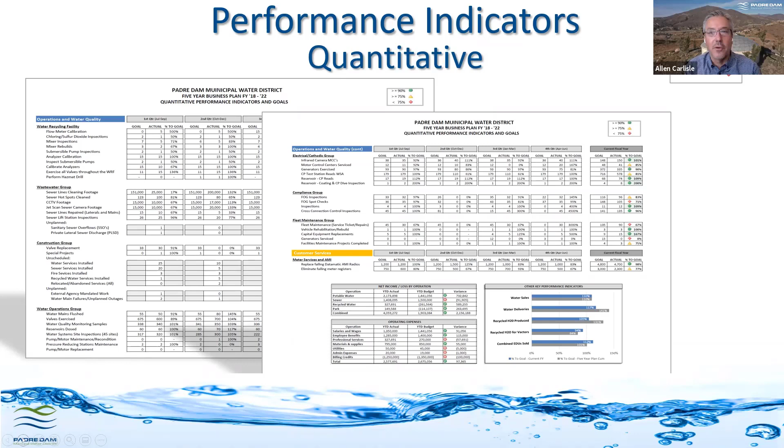With that background, I want to introduce Dr. Summer Girl, who will walk us through some of the workshop components. Before I turn it over to her, I want to thank the public for being part of this and giving us your input. We want to know what you're thinking, what you think we need to invest in, your concerns with your water district, and where you think we need to focus. I want to say one last thing: we recognize this is not our water district, it's your water district. We happen to be superintendents and managers of it for a short period in history, but it belongs to the community, and we're responsible to you — to listen and incorporate your concerns and ideas into any plan we create moving forward.

So with that, Summer, I'd like to turn it over to you. Are you ready to go? Thank you, Allen. I am.

It's good to see you all, and as the evening carries on, if more people join us, we'll welcome them in. As Allen said, my role this evening is to facilitate gaining input from you all. I'll walk you through what the agenda for the evening looks like. There will be opportunities to participate in a variety of ways, including listening to presentations on some projects currently going on in the district, participating in some polling, and time toward the end of the session for us to engage in dialogue. I wanted to highlight that typically these community forums would be held in a room, gathered together, sitting at tables and engaging in dialogue. Over the last year or so, many of us have become accustomed to engaging this way via a virtual platform.

Just a little bit about our water rates, some things you may or may not know. Basically, our water rates are broken down into 3 different areas. About 36% of our water rates go to purchasing actual water from San Diego County Water Authority, and about 23% of the rates go to capital investment in our infrastructure. As Allen mentioned, we have over $1 billion worth of infrastructure, things like reservoirs, pipelines, pump stations, and different things like that.

Mark Niemiec, our Director of Engineering, will highlight some of the major projects we've been working on more recently. The remaining 41% goes to Padre Dam's operations, which is what it takes to operate and maintain the system. There's a couple of slides Mark will touch on regarding certain areas engineering works on, and the operations department as well.

There are some unique rate factors to Padre Dam that make it very hard to compare rates among different districts, so we wanted to mention a couple of those. The first is that all of our water is imported. We get the water from the County Water Authority, and that's what the rate is that we pay for — 36% of your rates go to that.

There are other districts that have the benefit of local groundwater or reservoirs. For example, if you have a reservoir and it rains, you get free water — all you've got to do is treat it. We pay for the water, and then we also have to treat it. That can be a huge offset to costs in a year, up to $2 to $3 million. We are trying to do something about that, so we're currently developing our own local water supply — that's our advanced water purification program, and Kyle will touch on that later.

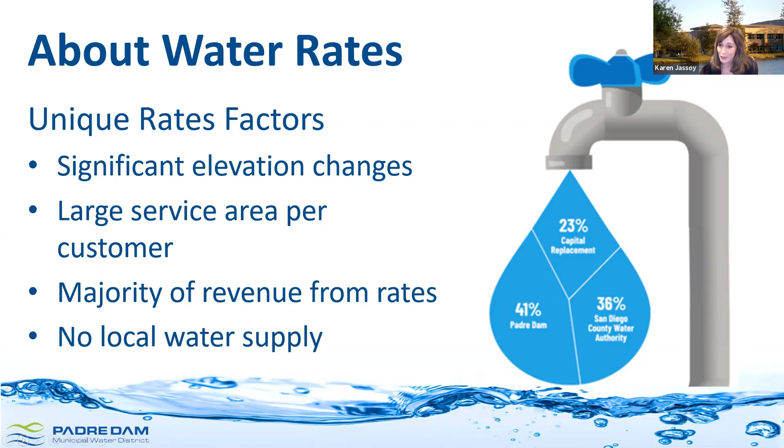It's all rates. Just wanted to mention here, in case you don't know, that we do have Santee Lakes recreational preserve, but that is run separately, so your rates don't go to run the park. That's all from the rates they charge for camping and day use, so it's run on its own, not by water or sewer rates. So those are the two main areas I wanted to talk about.

Over to Mark Niemiec, our Director of Engineering and Planning.

Thanks, Summer, that was a great poll. Good evening to all those participating in this workshop tonight. My name is Mark Niemiec, and I'm the Director of Engineering and Planning here at Padre Dam. I want to start by saying that modern, reliable, and sustainable infrastructure is important to the communities we live in. It connects the communities, drives our economy, and keeps us healthy and safe. The engineering department at Padre Dam provides responsible and technical support to plan, develop, design, and manage construction of our systems and facilities.

The engineering department really functions as one cohesive group, but we can break it down into three main subgroups or components: the capital improvement group, the development services group, and right-of-way. Each discipline has its own unique responsibilities and requirements, spanning a wide variety of tasks that we oversee and are responsible for. This gives you a good sense of an overview of the engineering and planning group.

Let's take a closer look at the Development Services Department. This work group provides the development community and individual customers with a resource to get answers and help process projects through Padre Dam and other jurisdictional agencies. It's often the first point of contact for individuals trying to build within the water district. Our support ranges from simple easement reviews to starting the process for new installation and collecting capacity fees. Our goal is to ensure that every project served by Padre Dam complies with district, local, and state regulations and standards, resulting in beneficial use to our system whenever possible.

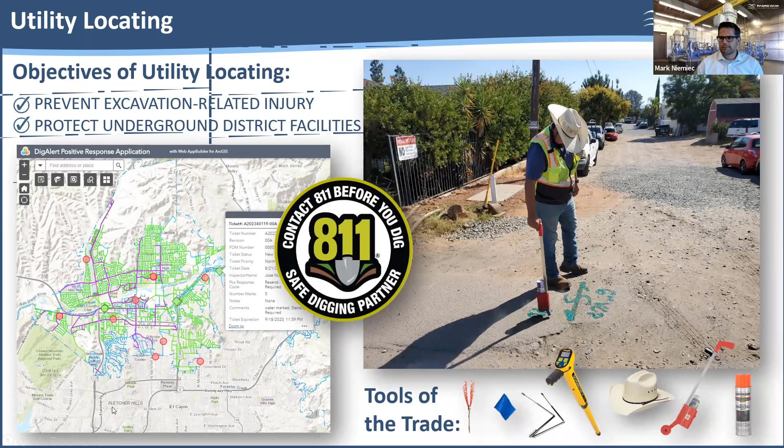In the engineering department, we also oversee our right-of-way and easement interests. Some of the core functions include safeguarding our interest in the acquisition and management of our properties, reviewing and writing legal descriptions for granting of easements, and reviewing and drafting of various property lease agreements, including cell sites. If you see antennas on some of our water reservoirs or tanks around the city, that's from cell providers.

The right-of-way agent also reviews development and CIP projects to ensure any right-of-way needs are adequately addressed.

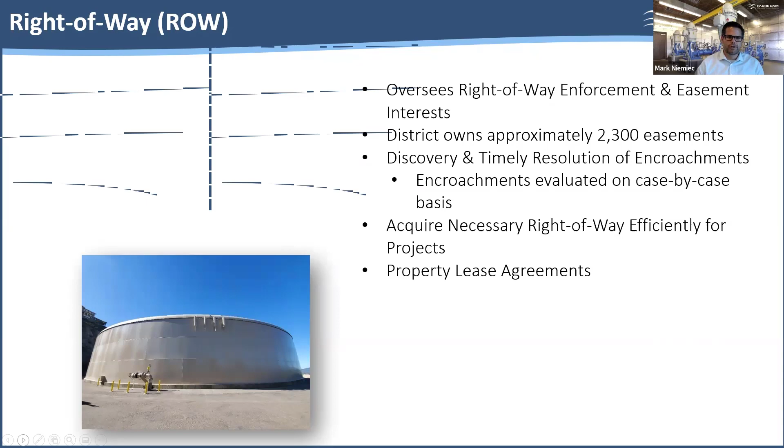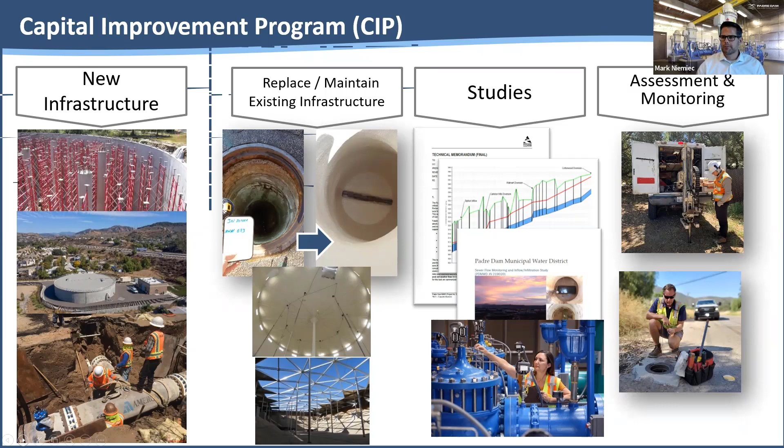So shifting to the next core group within engineering is the Capital Improvement Group, or CIP. They encompass a variety of projects, including projects that implement new infrastructure, projects that replace existing infrastructure, studies that analyze current conditions and identify optimum improvements for future projects, and projects that utilize emerging technologies to assess and monitor the condition of the assets and forecast remaining service life.

Ultimately, we're striving to meet the customer's needs. Like Allen mentioned, this is your system, and we're here to meet your needs in the most cost-effective manner. Through the development of the CIP and in conjunction with the 5-year business plan, Padre Dam ensures sufficient financial resources are invested to execute the identified priority projects. The foundation of the CIP is based on what we've termed the 3 R's: reliability, resiliency, and ratepayer affordability.

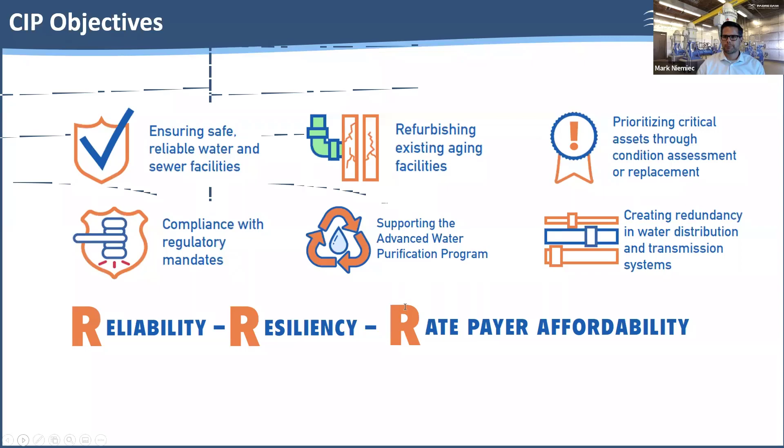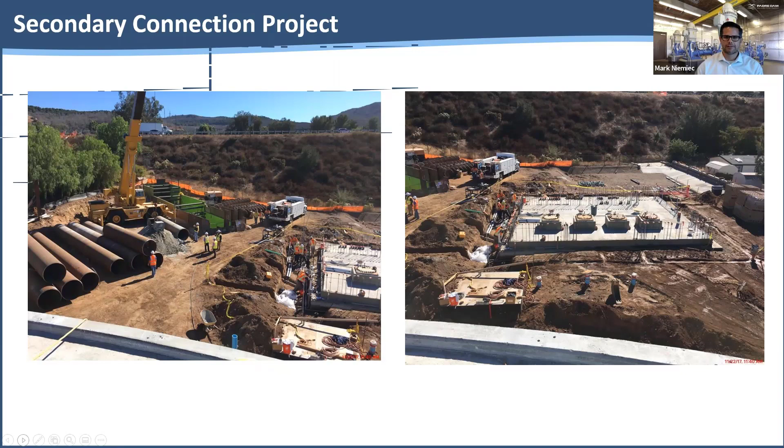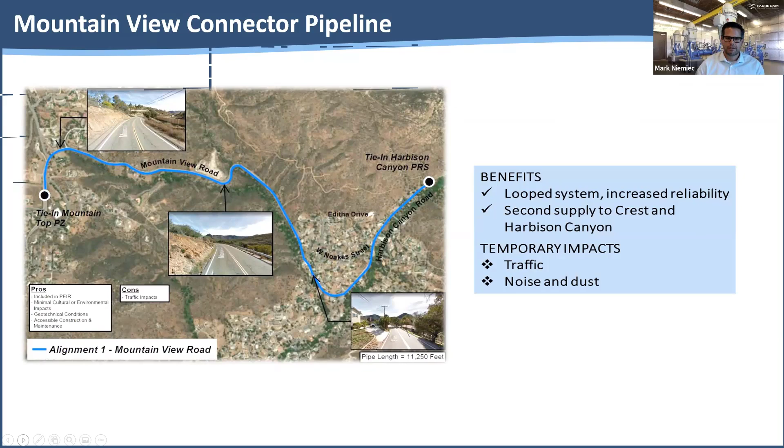Another project we wrapped up recently is the Mountain View Connector Pipeline. This was approximately a 2-mile pipeline that provided a secondary supply line to the Crest and Harbison Canyon areas. It benefits the system by looping it, meaning we have different ways to move the water around. Again, there's increased reliability. There were some temporary impacts that we managed during construction — that's where our inspectors come in, that's their job. Ultimately that project was completed on time and under budget.

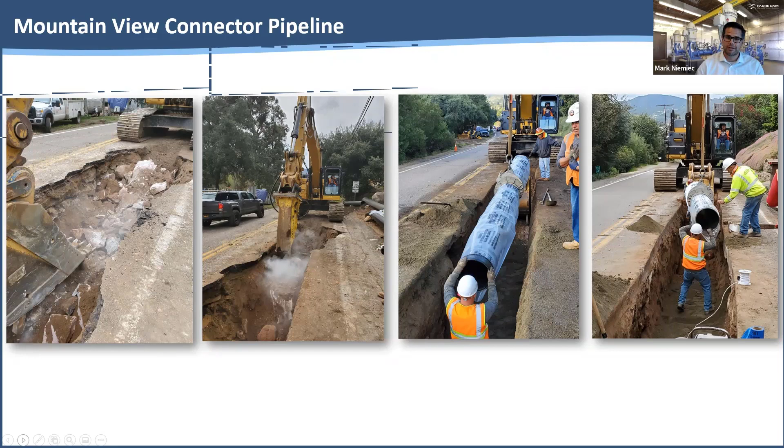Some more photos here of the work in the Mountain View Connector Pipeline area. You can see there is some excavation going on, and if you're from East County or have been around East County, you've seen trenches. There's lots of rock, so contractors deal with having to remove that rock so they can install the pipeline in the proper bedding with the proper surrounding and compaction on top. Again, inspectors are out there ensuring the new infrastructure is installed correctly so it'll last for years to come.

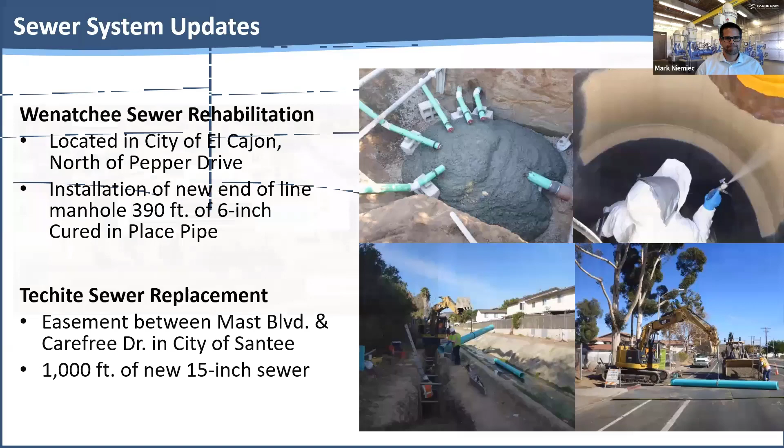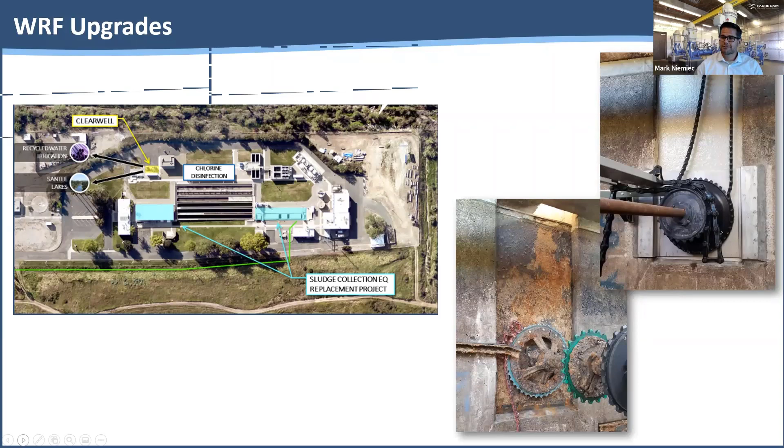Thanks, Mark. So I'm going to now turn it over to Kyle Swanson, who's the director of the East County Advanced Water Purification, and he's going to share with us some insights about resource management. Kyle. Great, thank you, Summer. Yeah, excited to share with you guys about the resource management. I'm going to start with an introduction to the East County Advanced Water Purification Project. So if you'd advance the slide, Summer.

Next slide. Mark gave an introduction in some of his last pictures to the Ray Stoyer Water Recycling Facility. Now if you look at this graphic, at the top there's that purple call-out bubble tagged Ray Stoyer WRF Water Recycling Facility. Padre Dam, as I mentioned, has had a really rich experience, many decades of operating a recycling facility, providing recycled water for both the Santee Lake system and a Purple Pipe Title 22 recycled water system.

Currently, wastewater flows through Mission Gorge Road. You can see the collection of wastewater flows coming from Santee — that's about 4 million gallons per day generated. The County of San Diego has approximately 3 million gallons per day flowing from the east side of that aerial image westward. And El Cajon contributes about 7 million gallons per day of wastewater flows that ultimately make their way out to the Point Loma plant and into the Pacific Ocean.

So Padre Dam currently takes off about 2 million gallons per day out of that total 14. So 12 million gallons continue out west, and Padre Dam takes the 2 million gallons, treats it, and produces recycled water. So the East County Advanced Water Purification Project will look at taking that flow that's available and producing a highly purified product water. Next slide.

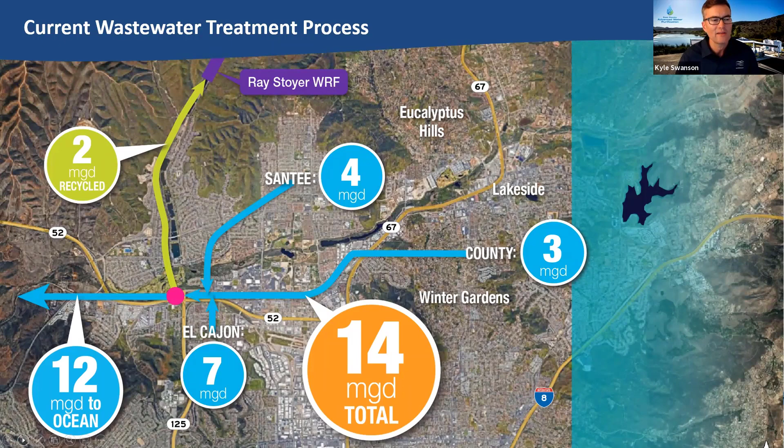And once that water makes its way into Lake Jennings, it'll sit in there for a little while and then be pulled out by Helix Water District's RM Levy water treatment plant that sits adjacent to Lake Jennings. Now that treated water coming out of that treatment plant will meet the needs of about 30% of the potable water here in East County. So that water will be delivered to Padre Dam's distribution system and to Helix Water District's distribution system.

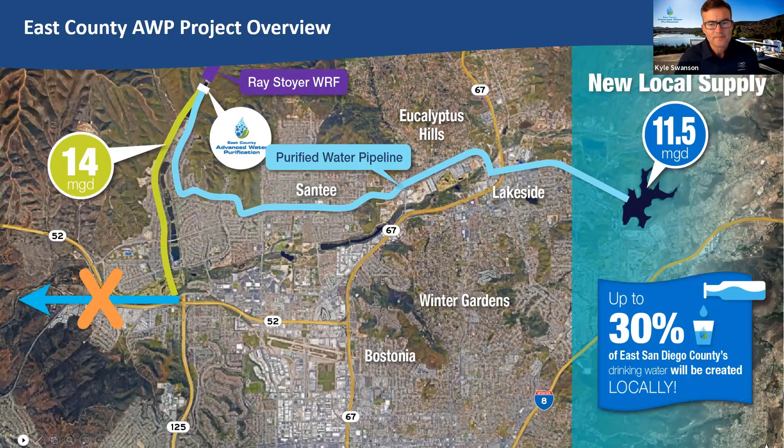Next slide. The project's currently in the design phase. We're around the 30% design. It's kind of like a marathon, a long run here. And these are the different packages that make up the East County Advanced Water Purification Project.

Package 1 is all the treatment facilities. That package has been awarded to the AECOM Lyles team, a joint venture. They're going to be designing and constructing a 16 million gallon new water recycling facility, a new 11.5 million gallons per day advanced treatment facility, and a solids handling facility.

Package 2 is that pipeline we talked about. That's about a 10 to 11 mile pipeline that's going to take that highly purified water from the treatment facility out to Lake Jennings. That package has been awarded to Orion GHD, and that's under the design phase also.

Package 3 is some improvements to existing wastewater pump stations and a new force main and residuals bypass system. That package has been awarded to the AECOM Lyles team, same as the Package 1 team. That package is also in design, so we're at 30% design for those 3 packages.

Package 4 is a new package. It's going to rehabilitate an existing East Mission Gorge force main and the construction and design and construction of a new regional brine line. That package is out for, we're in kind of the proposal phase right now. We're expecting to get proposals from a shortlisted list of firms that are interested here in the next few months.

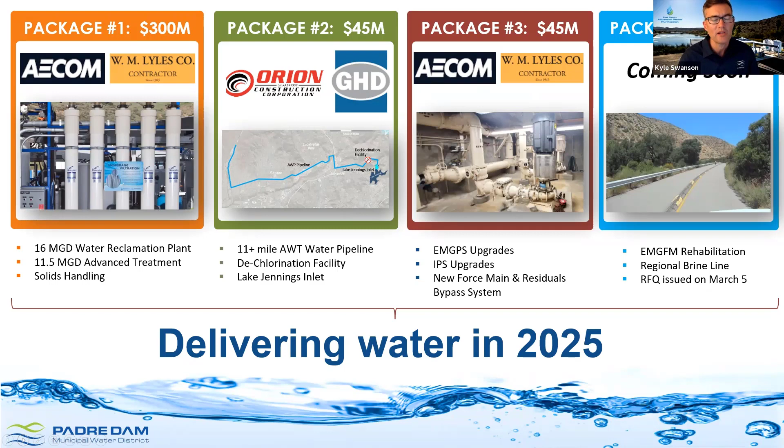Next slide. So that's kind of an update on an introduction, maybe for some, to the East County Advanced Water Purification Project. And just also wanted to touch a little bit on, under this resource management and sustainability, some other ideas that we had and that really need input from you, the public, and customers of the Padre Dam system, looking at other areas where we can manage these resources or concepts towards sustainability.

So Summer's going to get into another round of polls and questions to get your thoughts, but just to introduce them, maybe to get the creative juices flowing here, these are just some thoughts that we put down to introduce.

We talked about the East County AWP, which is securing a local drought-proof water supply here in East County. We talked about that project moving along, but also looking at integrating technology advancements to advance our conservation and water use, reducing energy consumption across the district. Mark talked about replacement of aging infrastructure, a great component to sustainability, looking at the pace we do that. Expanding green space at district facilities, including electric vehicles in the Padre Dam district fleet, and investing in artificial intelligence to optimize operations. So these are just some concepts and ideas.